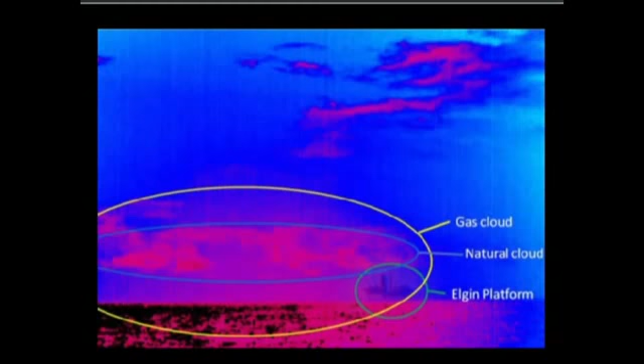The following is the dramatic infrared photograph showing the extent of the gas cloud at the abandoned Elgin platform, which was released yesterday by the environmental pressure group Greenpeace. The image was taken from the Greenpeace vessel Koningin Juliana, which sailed to the edge of the exclusion zone around the stricken installation 150 miles east of Aberdeen earlier this week.

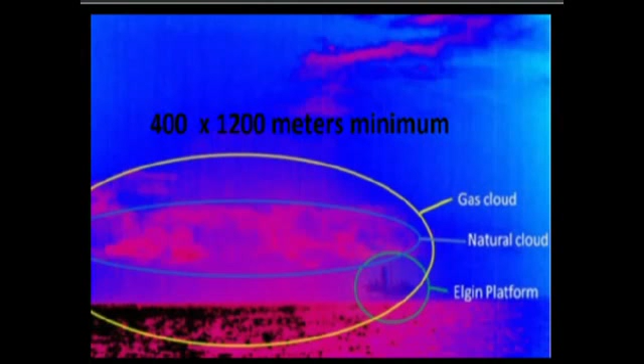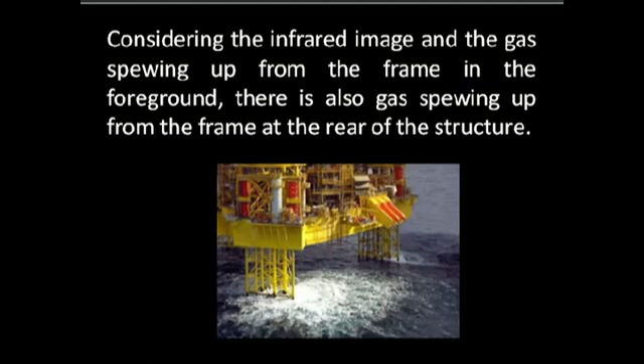Considering the infrared image and the gas spewing up from the frame in the foreground, there is also gas spewing up from the frame at the rear of the structure. The picture shows the temperature of the surface, with light tones showing hot and dark tones indicating cold. Methane gas has been leaking from the wellhead of the platform for days. The gas cloud is higher than the natural cloud. It is very difficult to say how high the gas cloud is, but we estimate between 200 and 500 meters.

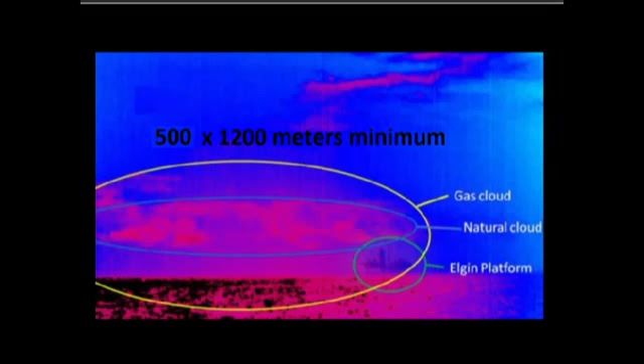The spokesman claimed this gas cloud of highly explosive gas is a very dangerous situation. The picture was taken from outside the security zone at a distance of 3 nautical miles around Elgin. Total has said it would send a team of experts by helicopter to the platform to assess how to stop the potentially explosive gas leak.

A jet turbine helicopter carrying a team of men would be murder, for the heat of a jet turbine or a Lycoming combustion engine gives off hot exhaust, and with absolute certainty it would ignite the gas 1,000 meters away from the rig. An engine requires air to work, therefore the engine could not land even if it did not set off the gas, as an engine will stall because it's starved of oxygen. It is all a lie. According to Total, the well at the centre of the gas release has been leaking gas at the rate of about 200,000 cubic metres per day.

The Zionists are desperate to destroy Yahweh's creation. They thought the massive gas bomb would work for them. However, his angels have moved the prevailing winds away from Europe towards the UK in order for the nations of the UK to wake up. Christ is back and will prevent the Zionists. Allah, Yahweh, Brian Leonard Golightly Marshall is his name. Presently, the winds have shifted, carrying the gas towards the UK.

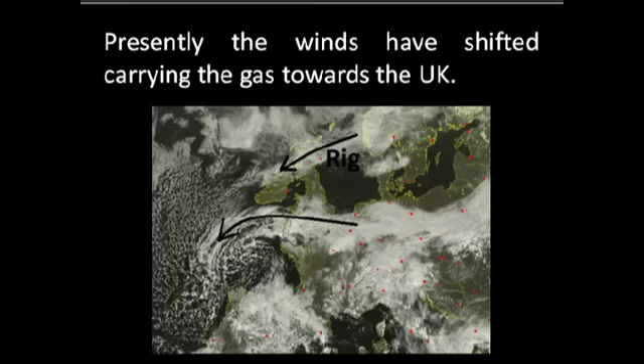The deteriorating problem in the Elgin crisis now has a gas bubble spreading across the sea. This eliminates using boats to tow the pipes. Helicopters can tow them, however. The pipes could be tethered to a helicopter by ropes several hundred meters in length. The pipes must have holes in the lower end of the pipe to allow gas to enter. In this scenario, gas holes need only be on one side of the pipe. The helicopter can easily tow the pipe from hundreds of meters altitude.

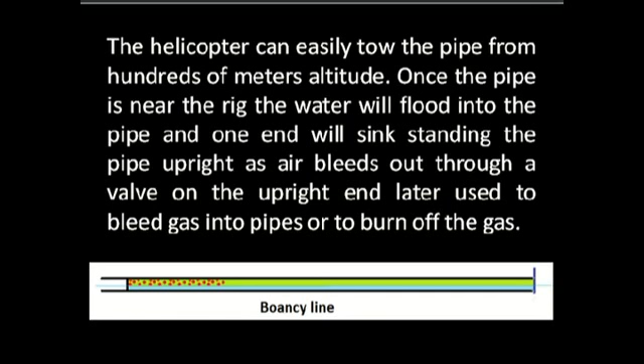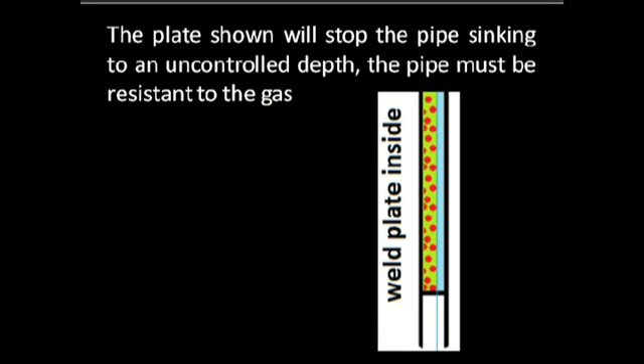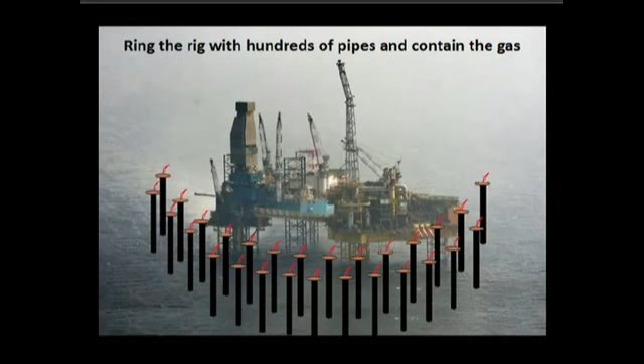Once the pipe is near the rig, the water will flood into the pipe and one end will sink, standing the pipe upright as air bleeds out through a valve on the upright end, later used to bleed gas into pipes or to burn off the gas. The plate shown will stop the pipe sinking to an uncontrolled depth. The pipe must be resistant to the gas. The rig must have a ring with hundreds of pipes around it to contain the gas.

The problem is time. Since the estimates will vary between Zionist corporate lies and reality, we can assume that it's 10 tankers of gas per day, as opposed to the 1 tanker that the Elgin spokesman announced. The disaster was intentional and designed to be unstoppable and explode. The blast would take out the rigs nearby, compounding the destruction.

The most pressing issue is how to place rocks under the rig. To achieve this, bags of fast-setting concrete are available. Dropping pallets of concrete suspended from helicopters can be easily achieved by flying over the rig above the gas cloud. The momentum of the weight will swing the pallet under the platform to fall into the sea, spilling off the pallet.

The project will require a ring of pipes as close together as practical, using fast-set concrete pre-hardened before dropping into the sea to form a loose arrangement, allowing the gas to seep into the pipes. Once the depth has been achieved to 20 meters by 200 meters diameter, it has to be sealed by dropping dry bags that will burst upon impact, sink and set, forming a cap.

The hardened concrete bags will pile up under the rig, loosely in a pile. The gas will later be sealed by a layer of wet concrete dumped on top of the rock pile. But before this can be done, a ring of containment pipes must be in place. The same hardened concrete is dumped around the upright pipe, filling a level pile throughout the sea floor. Then wet cement is dumped over the whole area.

Once the area under the rig is covered, out to and beyond the ring of pipes, the gas will seep through the rock layer into the upright pipes. Once the gas is moving into the pipes, the valves on top of the pipes are shut, sealing off the gas flow. Then the gas can be hooked to ships or to land by pipes. If the gas still continues to escape, albeit marginal, the uprights can burn off the excess.

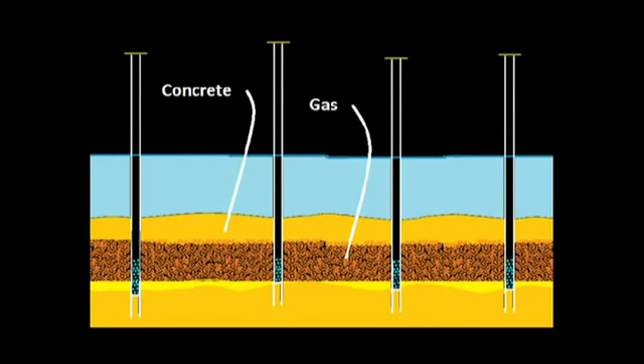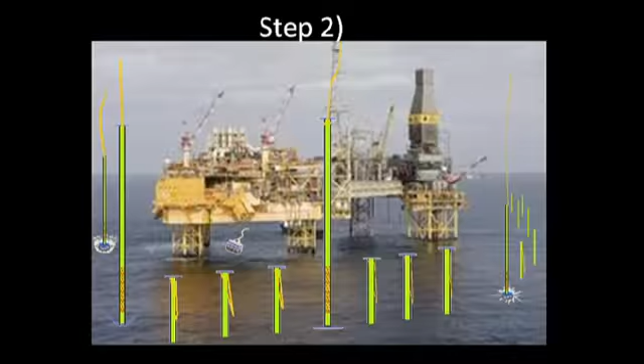So step one is to get the pre-hardened concrete bags by the pallet load, towed in by the helicopters on ropes, not by cables. A cable could cause a spark and ignite the gas. It has to be ropes, swung underneath the rig, piling up in the center. Step two is to position the ring of pipes with the holes in the lower end. Step three, then dump fresh, quick-set concrete to seal the entire area.

And there you have Yahweh's solution. What it will require is an army under orders of Vladimir Putin with help from Mahmoud just to get it done. No haggling, no procrastination. There is no time in this. Just do it.